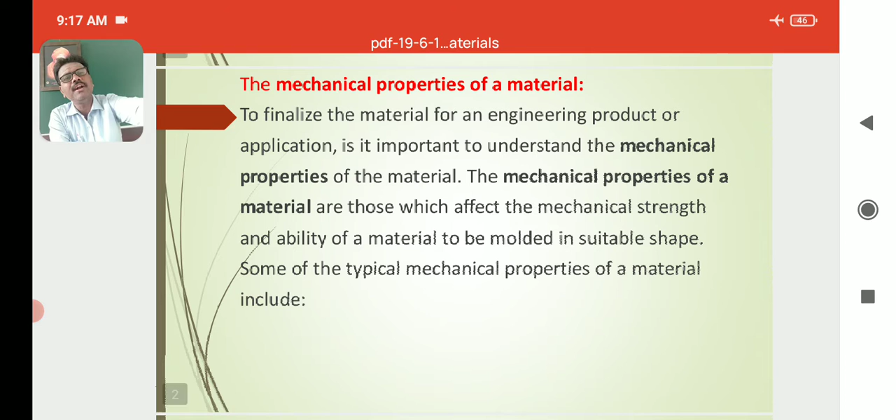We know that in our nature, matter can be classified into three types: liquid state of matter, gaseous state of matter, and solid state of matter. Further, solids can be classified into three types: rigid bodies, elastic bodies, and plastic bodies.

Then what are rigid bodies? What are elastic bodies? What are plastic bodies? Rigid bodies are those which do not deform, do not change their size and shape under the action of an external force. A rock, some iron, they are examples of rigid bodies.

Elastic bodies are those which deform under the action of external forces. They can change their shape and size, but they regain their original shape and size after the removal of the applied external forces. Rubber, steel, spring, they are examples of elastic bodies.

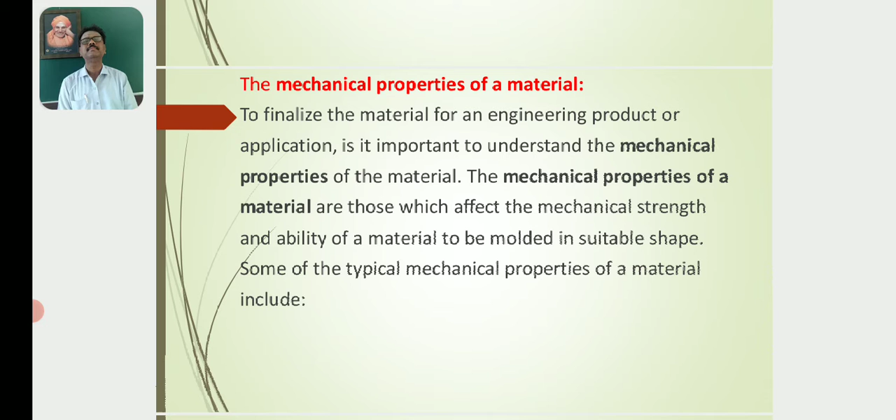So what are mechanical properties? Here are given some of the mechanical properties: strength, toughness, hardness, hardenability, brittleness, malleability, ductility, creep and slip, resilience, fatigue.

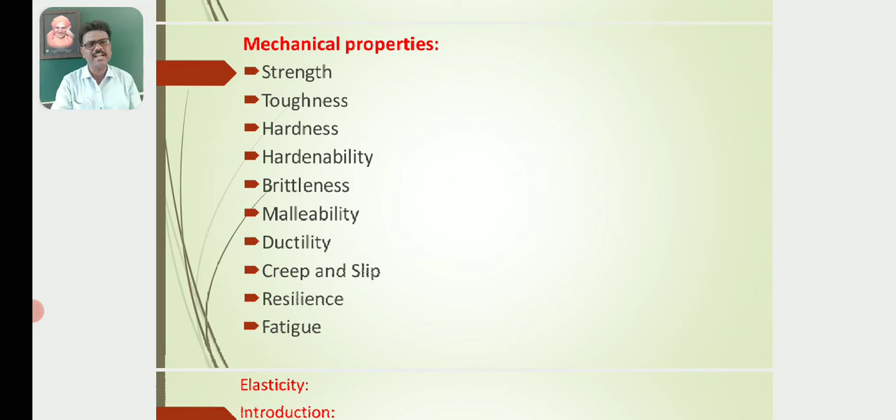In the previous class we discussed the mechanical property strength. But today, in this class, we discuss elasticity. What is elasticity? What are the different types of elasticity? Then the examples for elasticity, and how elastic materials can be used for various purposes.

If the distance between any two points in a body remains invariable, the body is said to be a rigid body. In practice, it is not possible to have a perfectly rigid body. That means in our nature, no body is perfectly rigid, no body is perfectly plastic, no body is perfectly elastic.

The deformations are: there may be a change in length, a change of volume but no change in shape, or a change in shape with no change in volume. That means the body undergoes multiple changes. All bodies get deformed under the action of force; the size and shape of the body will change on application of force.

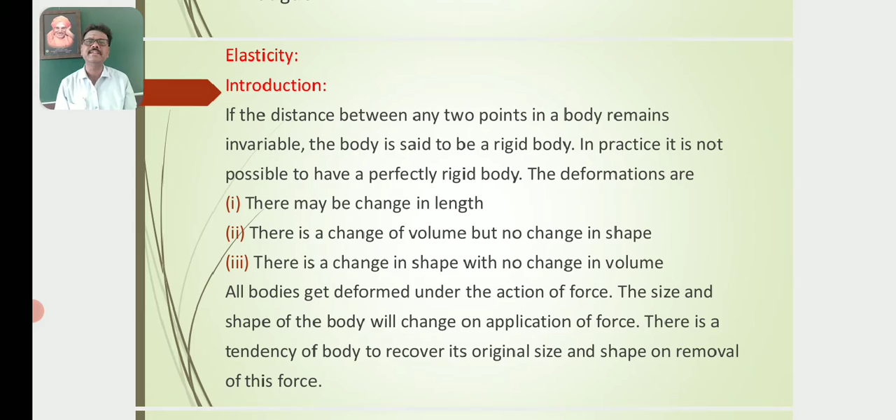There is a tendency of the body to recover its original size and shape on removal of this force, so-called elasticity. The property of a body, by virtue of which it recovers its original shape and size on the removal of applied external forces, is called the property of elasticity. So the property of a material body to regain its original condition on the removal of deforming forces is called elasticity.

Quartz fiber is considered to be the perfectly elastic body. So what is plasticity? The bodies which do not show any tendency to recover their original condition on the removal of the deforming forces, this is called plasticity. Putty is considered to be the perfectly plastic body.

The load is the combination of external forces acting on a body, and its effect is to change the form or the dimensions of the body. Any kind of deforming force is known as load.

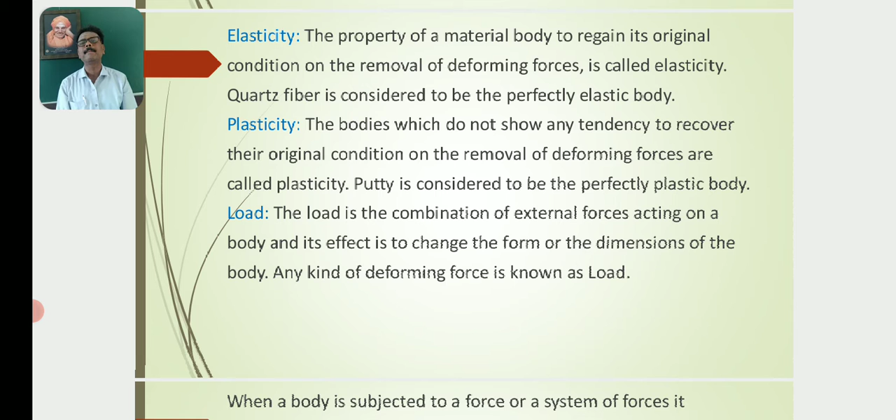When a body is subjected to a force or a system of forces, it undergoes a change in size or shape or both. Elastic bodies offer appreciable resistance to deforming forces, so work has to be done to deform them. This amount of work is stored in the body as elastic potential energy. When the deforming force is removed, this increased elastic potential energy produces a tendency in the body to restore itself to its original state of zero energy or stable equilibrium. This tendency is due to the internal forces which come into play due to the deformation.

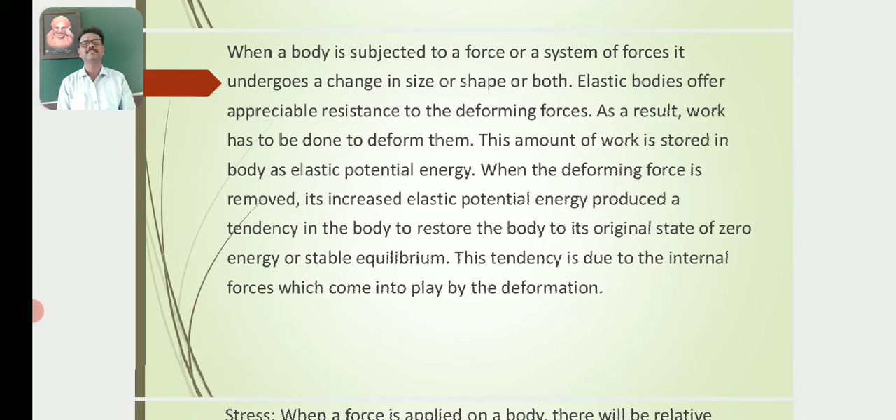When external forces act on a body, it undergoes a change in size or shape or both. Elastic bodies offer appreciable resistance to the deforming forces, and as a result, work has to be done against the deforming forces. This amount of work done is stored in the elastic body as elastic potential energy. When the deforming forces are removed, with the help of this elastic potential energy, the body regains its original shape and size. This is called the elastic property of the material.

Then what is stress? When a force is applied on a body, there will be a relative displacement of the particles. When external forces act on the body, there must be a relative displacement of the particles inside it. Due to the property of elasticity, the particles tend to regain their original positions. The restoring or recovering force per unit area set up inside the body is called stress. So the basic definition of stress is the restoring force generated inside the body per unit area.

Usually stress is measured in terms of the external forces acting on the body, that is, the load or force applied per unit area. Hence its unit is dynes per centimeter square in the CGS system and Newton per meter square in the MKS system.

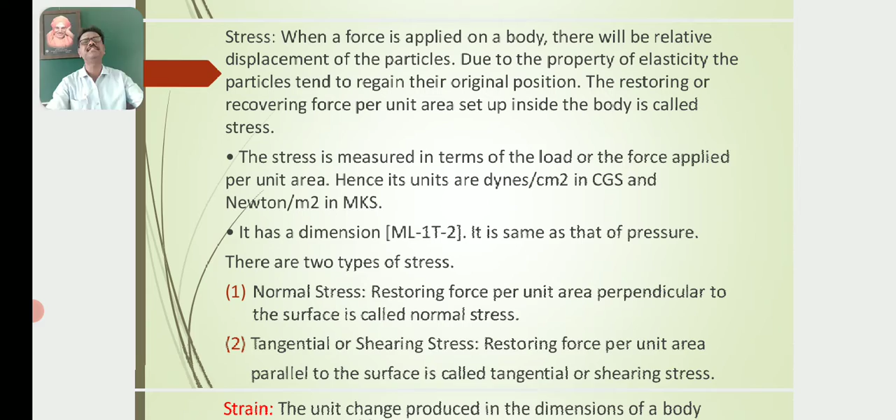So what is strain? It is the ratio of change in dimension to the original dimension. The unit change produced in the dimensions of a body under a system of forces in equilibrium is called strain. Since strain is a ratio, it has no unit. There are three types of strain.

Longitudinal or linear strain is defined as the increase in length per unit original length of an object when it is deformed by external forces. The ratio of change in length to the original length is called longitudinal or elongation strain, equal to change in length divided by original length. It is also called elongation strain or tensile strain, which has no unit.

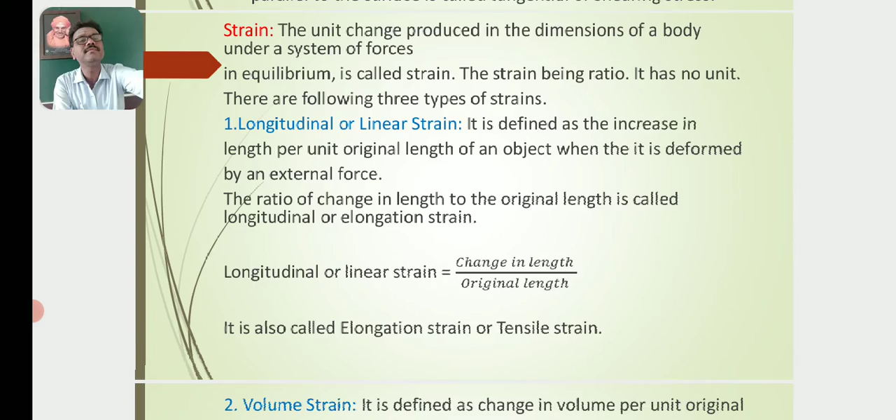Volume strain is defined as the change in volume per unit original volume when an object is deformed by external force. The ratio of change in volume to the original volume is called volume strain, equal to change in volume divided by original volume.

Then shear strain. When the force applied acts parallel to the surface of the body, the change takes place only in the shape of the body. The corresponding strain is called shear strain. The angular deformation produced by an external force is called shear strain.

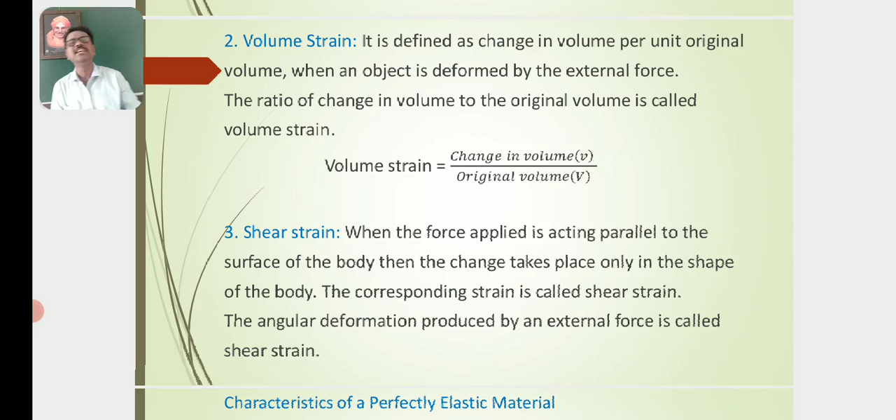Characteristics of a perfectly elastic material: if a body is perfectly elastic, the strain is always the same for a given stress, and the strain vanishes completely when the deforming force is removed. For maintaining the strain, the stress must remain constant.

Then what about Hooke's law? This fundamental law of elasticity was proposed by Robert Hooke in 1679, and it states that provided the strain is small, the stress is directly proportional to the strain. In other words, within the elastic limit, the ratio of stress to strain is a constant quantity for a given material, and this constant is called the modulus of elasticity or coefficient of elasticity.

Stress is directly proportional to strain within the elastic limit. Stress is equal to E into strain, so E is equal to stress by strain, where E is a proportionality constant known as modulus of elasticity or coefficient of elasticity.

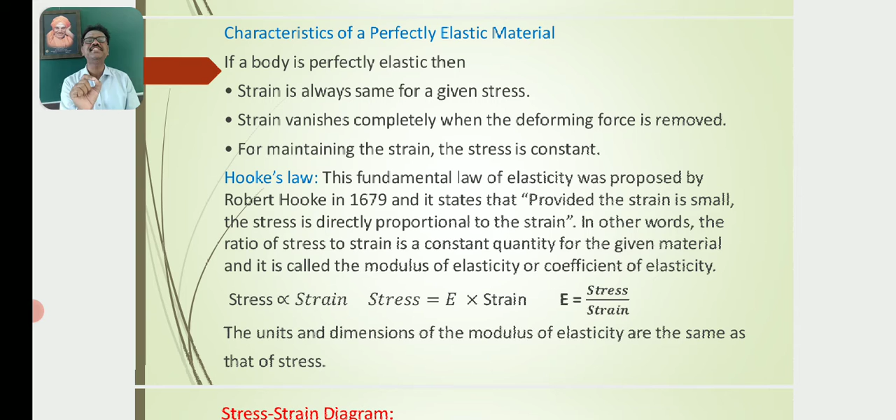Now you see the stress strain diagram. Here as stress increases, strain also increases, reaching a maximum value up to point A. Up to point A, there is a linear relation between stress and strain, so-called elastic range.

Beyond point A, the body loses its elastic property, so point A is known as the elastic limit. Beyond that point, the body converts from an elastic body to a plastic body, exhibiting the property of plasticity where it does not regain its original shape and size, so-called plastic range.

If we again increase the stress, say at point E, this is called the point of fracture, where the body breaks up. This is what we have about the stress strain diagram.

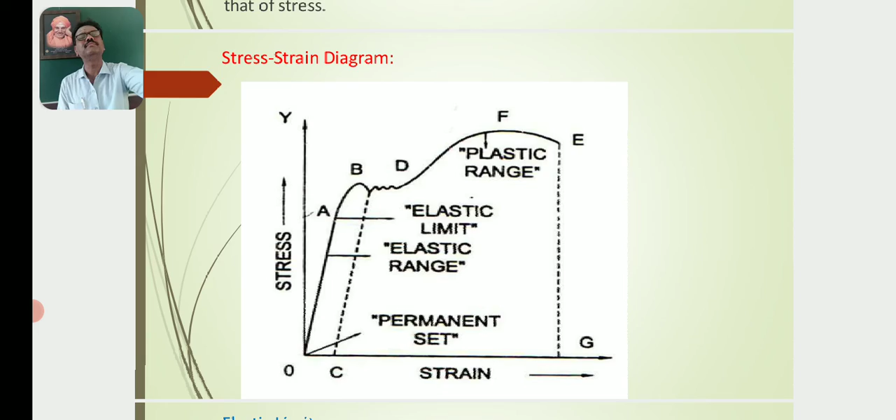Elastic limit: when the stress is continuously increased in the case of a solid, a point is reached at which the strain increases more rapidly. The stress at which the linear relationship between stress and strain holds good is called the elastic limit of the material. Elastic limit means it is a limit up to which stress is directly proportional to strain.

Under that condition, the body regains its original shape and size. So under that condition, the body obeys Hooke's law.

So what we say in the above diagram, a stress strain diagram, the direct proportionality between stress and strain is found to be true only for small values of strain as shown in the above diagram.

The portion OA of the curve is a straight line showing that stress is directly proportional to strain. It shows that Hooke's law is strictly obeyed up to the value of stress corresponding to point A. This point is called the elastic limit.

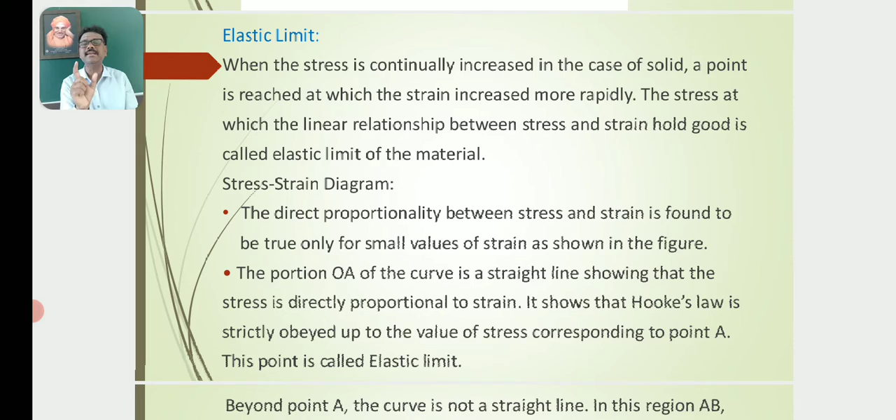Beyond point A, beyond the elastic limit, the curve is not a straight line. In this region AB, the strain increases more rapidly than the stress, and the behavior is partly elastic and partly plastic.

If the object is unloaded at B, it does not come back to its original condition along path AO, but takes the dotted path BC. This is what we see in the above diagram, the dotted path BC.

If the object is unloaded at point B, if it exhibits perfect elasticity, it should follow the path AO, but it does not come back to its original condition along path AO, instead taking the dotted path BC. The object is said to have acquired a permanent set, a permanent change, and OC is called the residual strain.

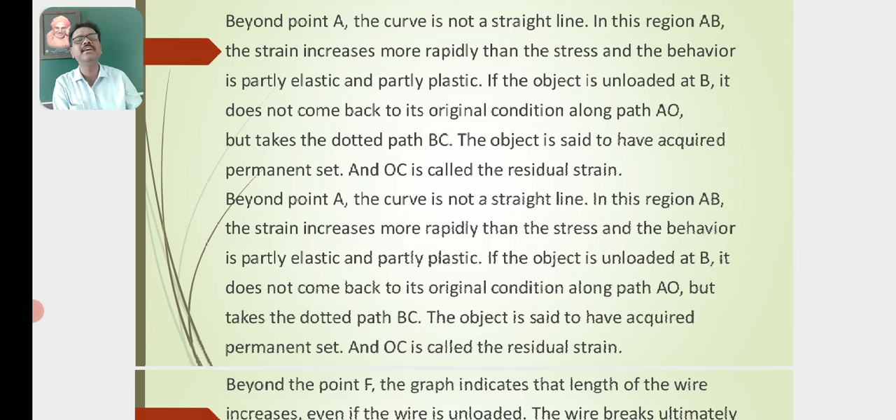Beyond point A, beyond the elastic limit, the curve is not a straight line. In this region AB, the strain increases more rapidly than stress, and the behavior is partly elastic and partly plastic. If the object is unloaded at B, it does not come back to its original condition along AO, but takes the path BC. The object is said to have acquired a permanent change, and OC is called a residual strain.

Beyond point F, the graph indicates the length of the wire increases even if the wire is unloaded. The wire breaks ultimately at point E, called the breaking point of wire. The portion of the graph between D and E is called the plastic region, where the body exhibits the property of plasticity and does not regain its original shape and size. At point E, the body breaks up, and this point is called the breaking point of the wire.

So this is a summary of the graph we saw in the previous slide. We have three types of elasticity, corresponding to three types of strain.

Linear elasticity, called Young's modulus, corresponding to linear strain. Elasticity of volume or bulk modulus, corresponding to volume strain. Elasticity of shape or shear modulus, also called modulus of rigidity, corresponding to shear strain.

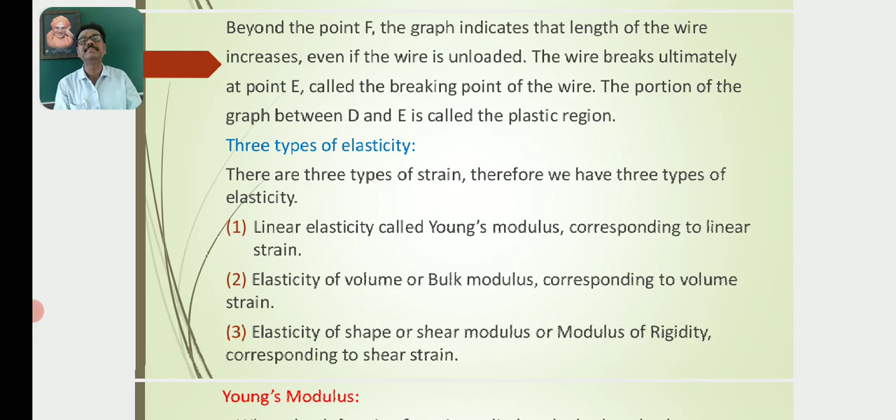So called, we have three types of elasticity. Now let us discuss about what is Young's modulus.

When the deforming force is applied to the body only along a particular direction, the change per unit length in that direction is called longitudinal or linear or elongation strain. The force applied per unit area of cross section is called longitudinal or linear stress.

The ratio of longitudinal stress to linear strain within the elastic limit is called Young's modulus. Young's modulus, represented by the letter Y, is equal to longitudinal stress by linear strain, that is, tensile stress by linear strain.

Consider a wire of length L having area of cross section A, fixed at one end and loaded at the other end. Suppose a normal force F is applied to the free end of the wire and its length increases by l, say small l.

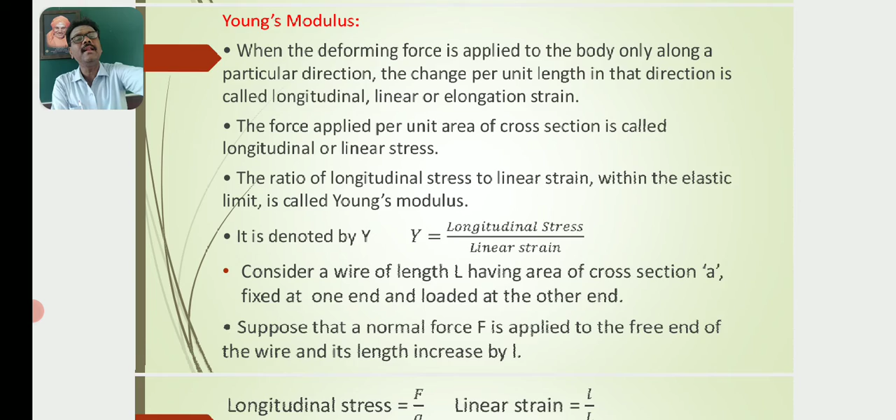So longitudinal stress is equal to F by A, and linear strain is l by L, change in length by original length. Substituting in the above equation, we get Y is equal to F/A divided by l/L, so Y is equal to FL by Al.

Young's modulus can also be defined as the force applied to a wire of unit length and unit cross-sectional area to produce an increase in length by unity.

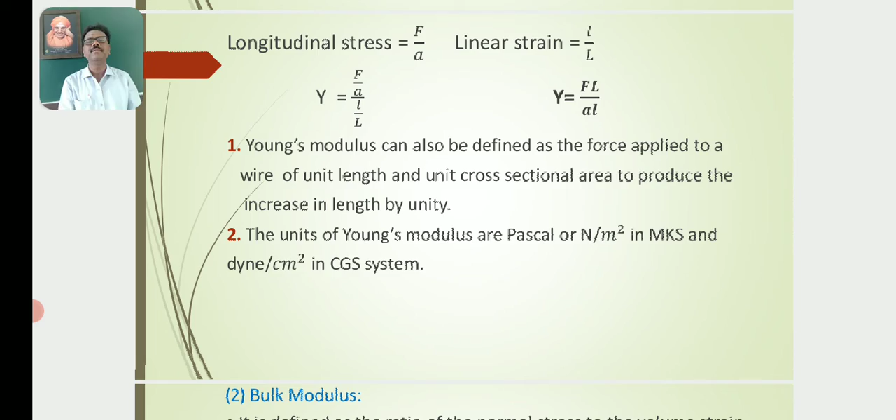The units of Young's modulus are Pascal or Newton per meter square in the MKS system, and dyne per centimeter square in the CGS system.

Now let us discuss about bulk modulus. It is defined as the ratio of normal stress to the volume strain. The bulk modulus is represented by the letter K.

The bulk modulus is also known as the coefficient of cubical elasticity. Bulk modulus K is equal to the ratio of normal stress by volume strain.

Consider a cube of volume V and surface area A. Suppose a force F acts uniformly over the whole surface of the cube and produces a decrease in its volume by v. Then normal stress is equal to F/A, force per unit area, and volume strain is equal to v/V, change in volume by original volume.

Then bulk modulus K is equal to F/A divided by v/V, so K is equal to FV by Av. The units of bulk modulus are Pascal or Newton per meter square in the SI system.

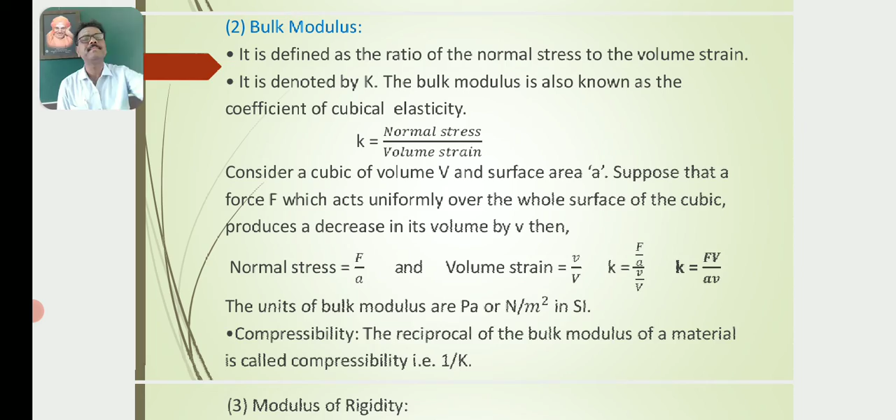Now let us discuss about the modulus of rigidity, the rigidity modulus. It is defined as the ratio of tangential stress to shear strain. It is also called shear modulus, denoted by N. N is equal to tangential stress by shear strain.

Consider a rectangular block whose lower face ADCC is fixed and the upper face ABBD is subjected to tangential force F.

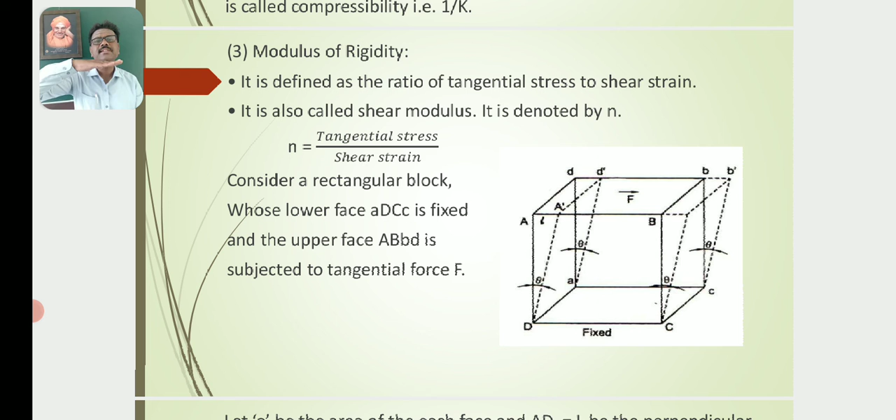So now you see the rectangular block. There are 6 faces, whose lower face ADCC is fixed to the rigid support, and the upper face ABBD is subject to the tangential force. That means the applied external force is tangential to the surface ABBD.

Let A be the area of each face, and AD equal to L, the perpendicular distance between them. The tangential force will displace the upper face of the parallelepiped by a distance AA' equal to l. If the angle ADA' is equal to theta, then theta is the angle of shear.

If the angle ADA' is equal to theta, that is the angle of shear, then the tangential stress is the tangential force per unit area, F/A, and shear strain is equal to theta, also called the angle of shear.

Then N is equal to F by A theta. This is the expression for rigidity modulus. The units of rigidity modulus are Pascal or Newton per meter square in the SI system.

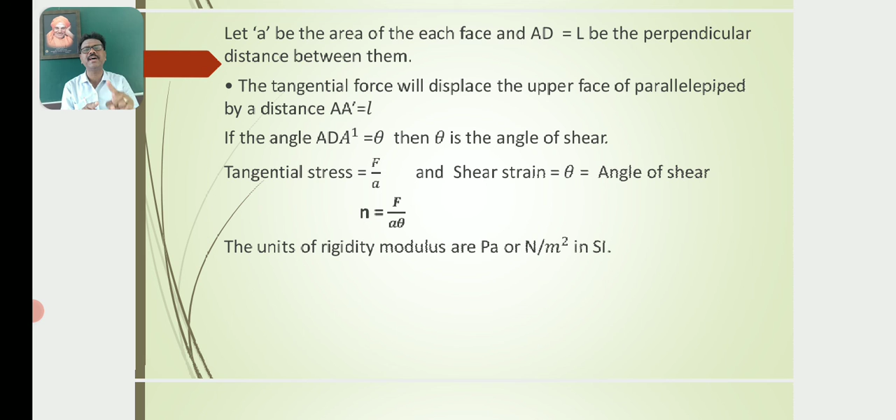So in this class we discussed different types of matter, different states of matter, types of solids, mechanical properties of solids, the list of mechanical properties, elasticity, elastic bodies, stress, different types of stress, strain, different types of strain, stress strain diagram, the summary of a stress strain diagram, then Young's modulus, rigidity modulus, bulk modulus, and their expressions, their units, and so on.